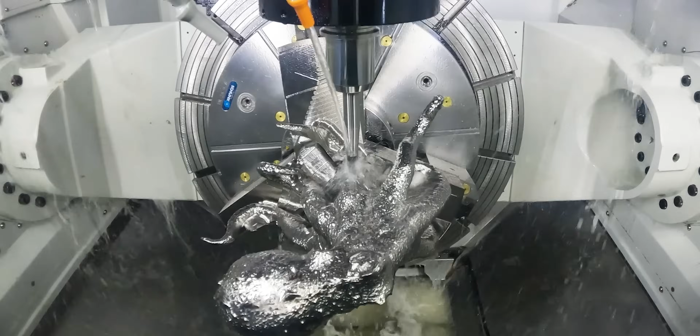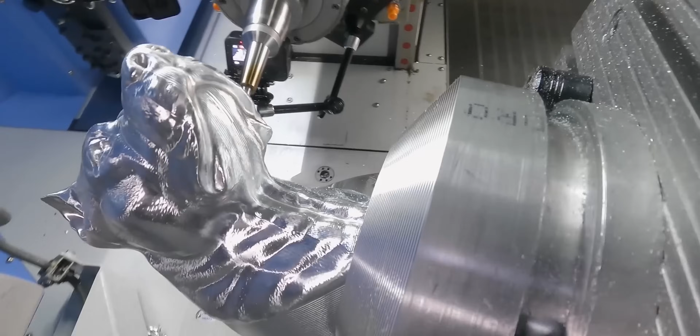In this video, we're going to be machining the Titan 200M. Before we get started, make sure that you've downloaded and printed the process document and all of the other documents related to this part. We've already completed the first operation because you should be able to take the setup sheet and what you learned in the Titan 139 video and apply it to this part and machine this first operation

on your own. So before you watch this video, make sure that you have completed operation 1, and if you need any help with that, refer to the Titan 139M tutorial. Now we've already loaded the tools and the program into the machine. Now we're going to look at our setup sheet of how we need to install the part into the vise. And there we can see that it's set up the same way as the Titan 139.

So Z0 is off the bottom of the part and X and Y is off the center of the part. So we're going to set Z before we put the part in the vise. Now we've probed the bottom of the vise to set our Z, but as you can see how tall this part is, and we've got a hat all the way around the material, touching off X and Y is not going to be as easy.

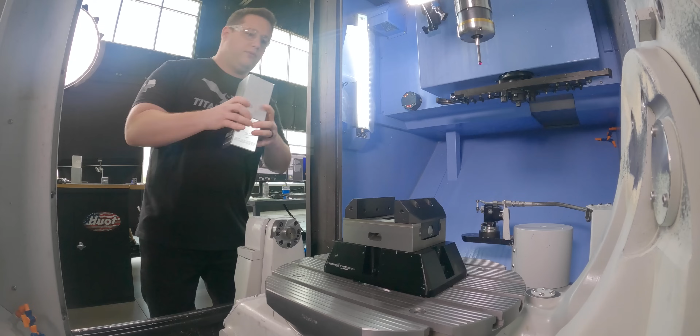So I'm going to show you a little trick that we can do in order to set our X and Y work coordinate. So first we're going to lightly clamp on this part where we want it in the vise and then install a vise stop. Now that I got my stop set, we actually need to set our C axis before we set X, because if we're crooked in any way, then our X and Y is going to be shifted off.

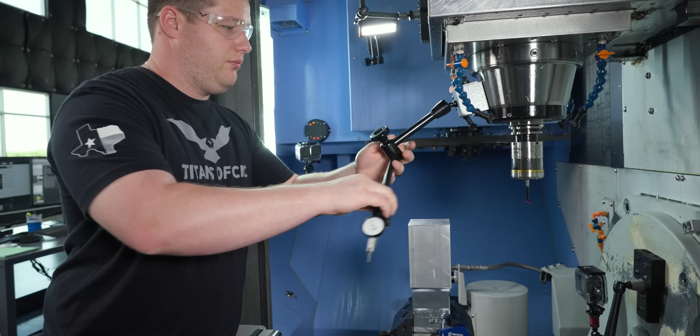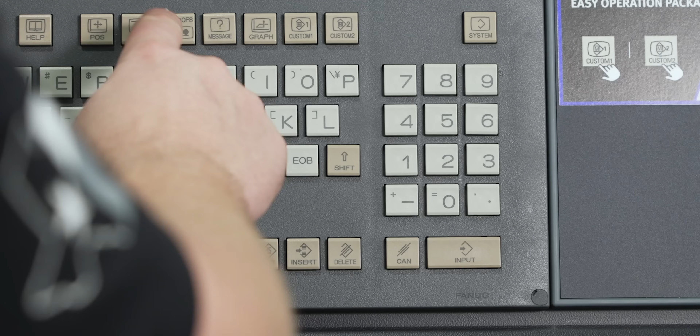Now in Op 1, we just indicated the vise jaw itself, but this is a centric vise, meaning both jaws can move, so we could have a little play there. And since we have a finished surface, we want to check that finished surface and make sure that it is in line with our C axis. All right, so now that our indicator is reading 0, we're going to go to our offset screen, go to our work, arrow down to our G54C, and I'm going to put C0 and measure.

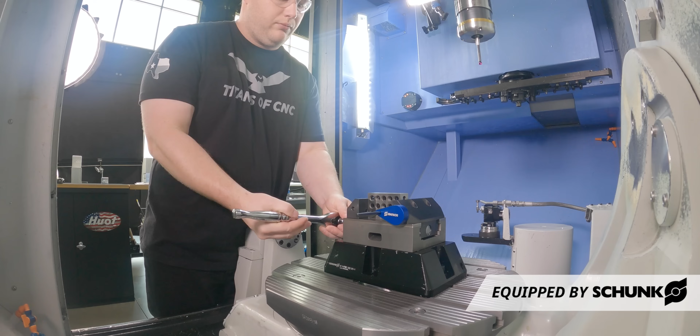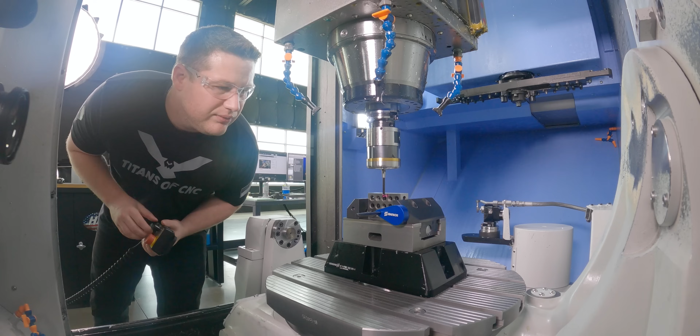Now we can take this part out and insert a 1-2-3 block in order to teach our X axis. So the reason why we're using a 1-2-3 block is because it has a ground face. And we have it pushed up against the vise stop because that is where the face of our part is going to sit. So what we're going to do is take our probe, we're going to probe this face, and then we're going to shift it over by half of whatever our part measures. That's going to set the X-axis work offset to the center of the part.

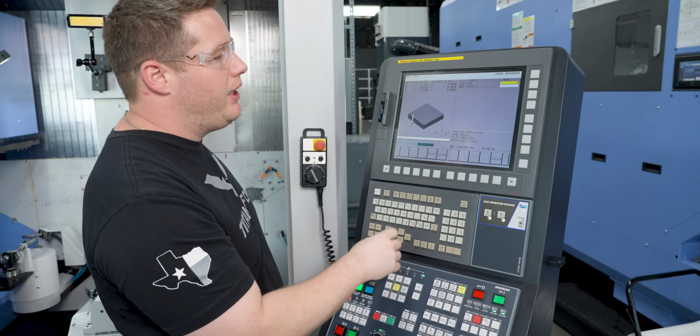All right, so now we got the probe positioned, so we're going to go to the GUI screen. We're going to select probe, but this time we're going to select edge. Now up here in the top right corner, we can see edge type. And we have a little graphic display right here on the left. So if we toggle this with our arrow, we can see the display changes to select what face we want to probe. So we're going to arrow over until we see the X negative direction.

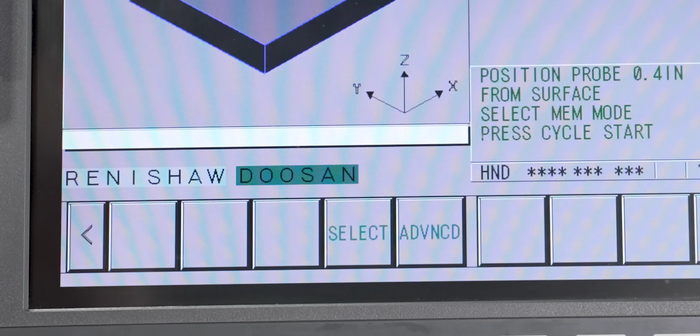Next, we're going to arrow down. Now we're going to input what work offset number we want to update. And in this case, it's 54. So we're going to type in 54 and hit input. Now all we got to do is put it in memory mode, close our door, and hit cycle start.

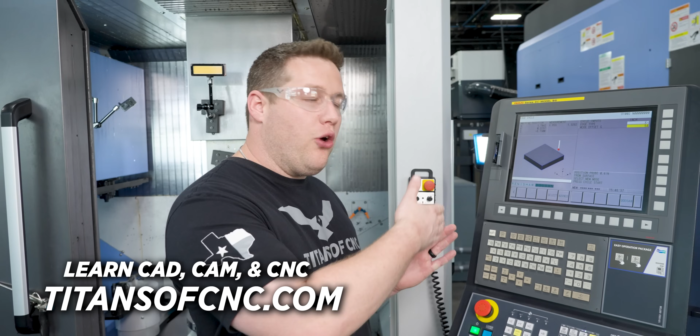Now after we probe that edge, we're not done just yet, because what that did is set our work offset on the edge of the part. But we need it in the center. So what we need to do now is measure our part, and whatever it measures, we need to take half of that and shift it in our work offset.

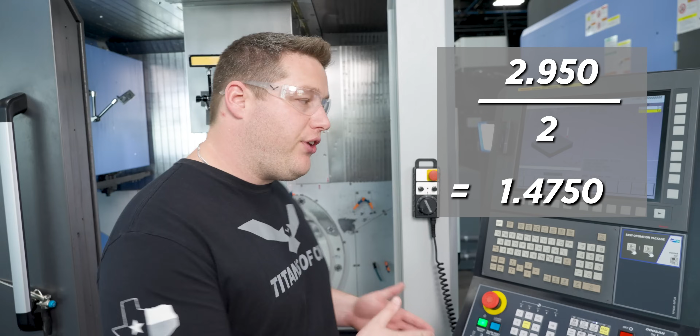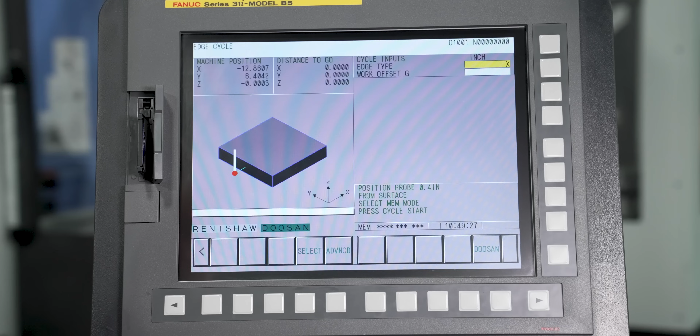So my part actually measures exactly 2.950. So half of that would be 1.475. And since I set my stop up on the right side, I need to shift negative 1.475. So what we're going to do now is I'm going to hit reset to clear out anything that might be active. We're going to go to offset. I've already got my work called up.

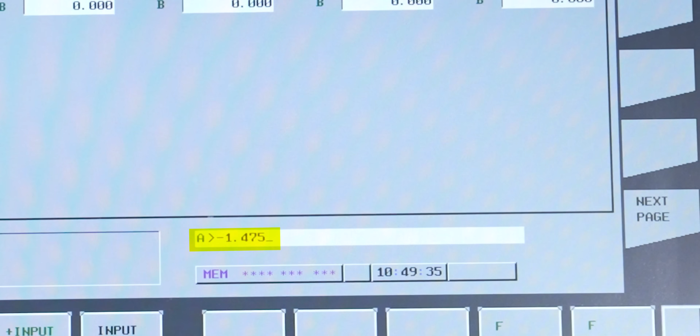And on my G54, I'm going to go to X and I'm going to say minus 1.475. Make sure the number is correct, and I'm going to hit input plus. That's going to ask me, is this input okay? And I'm going to hit execute. So with that, our X-axis is set, so now we need to set Y. And for that, we're going to go ahead and put the material in the vise and get it clamped down.

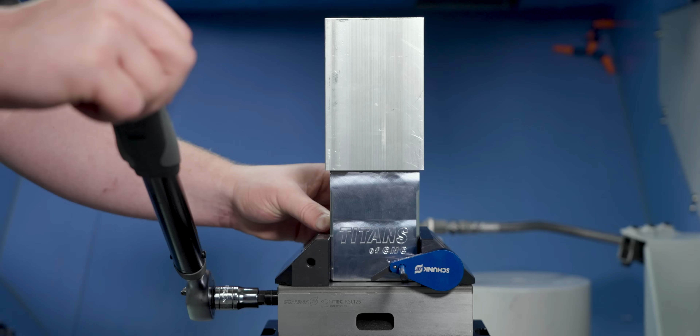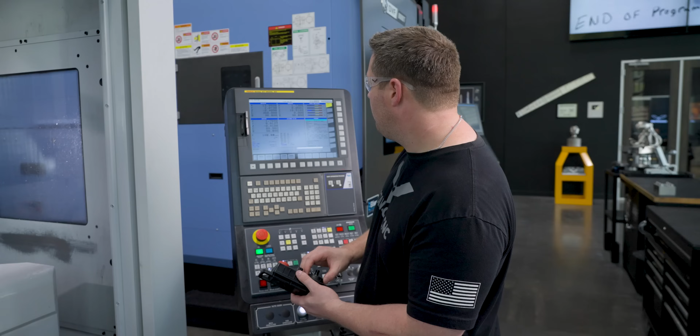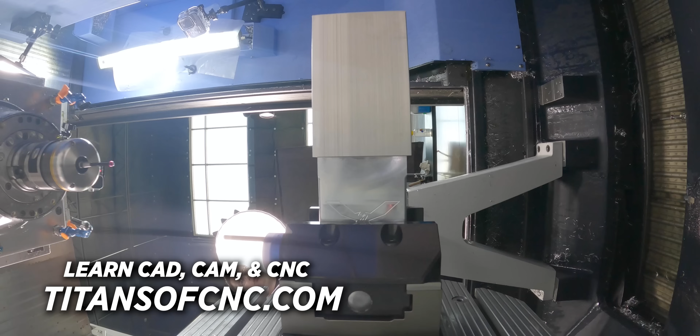So if I take my hand wheel and I rotate this down to 90 degrees, so now I'm at B90. Now I can simply position the probe in the center of the part. So now you see the probe is positioned roughly in the center of the part, ready for the web routine.

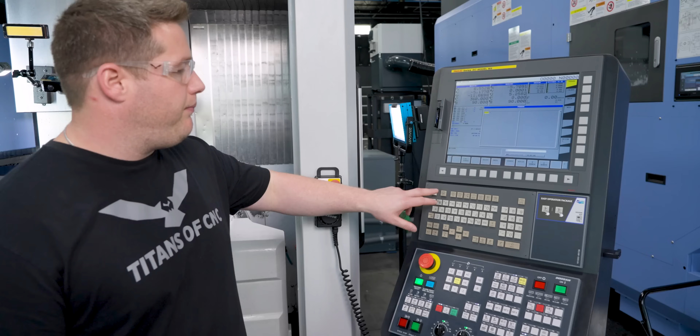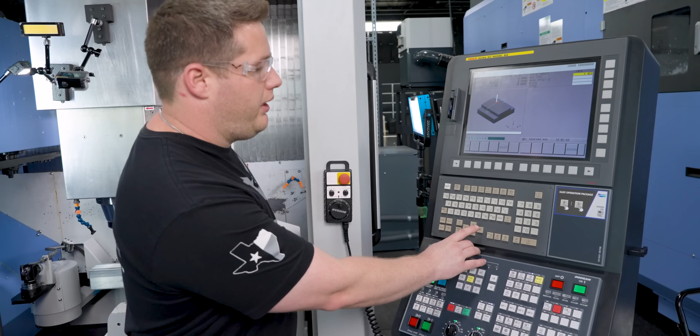Now one thing to keep in mind here is that we want to make sure that your C-axis is at C0. So now we'll go to the control and type in our parameters for our web routine. So we're going to put it in MDI mode, go to program, make sure we hit reset a few times. We're going to go to GUI and probe. Now we're going to hit that web. Now we're going to change to Y web.

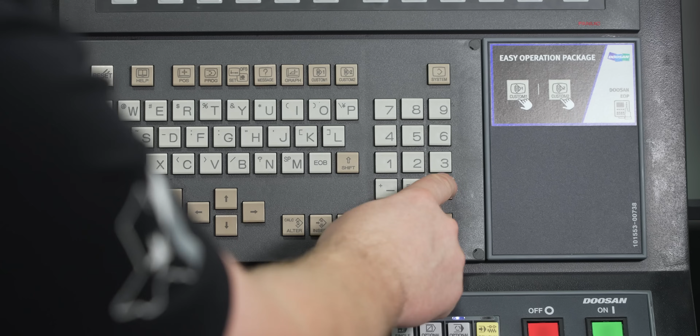We're going to set G54. The width, I'm just going to say 3 inches. That's just a little bit over what our finished size is. And for our depth, I'm just going to put in a 1/2 inch. So now all I got to do is close the door, put it in memory mode, and hit cycle start.

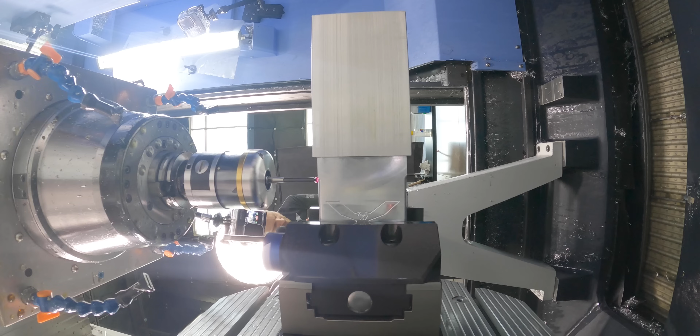So now we've probed our work offset, it's time to do a dry run. But as you can see, the part is so tall that we won't be able to just add 6 inches to the height and run the program. So what I recommend doing is, now that we have a vise stop set, you can remove your part, dry run the program, then put it back in to run the part.

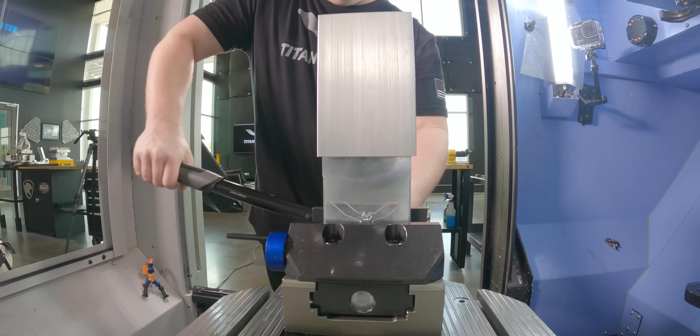So we just completed our dry run, we got the part put back in. Now I'm going to remove the vise stop, and it's time to cut some chips. Now we're not using coolant on this part, but that's just for filming purposes. If you run yours, make sure that you run coolant.

Now notice on this part, when we're on the third side, we're kind of working up that wall and it's barely even touching any material. That's because on the stock tab in our Mastercam file, we had it set to ignore small cusp and we had a 25 thousandths value in there. You can actually go back and play with that value to make this cut even more or a little less.

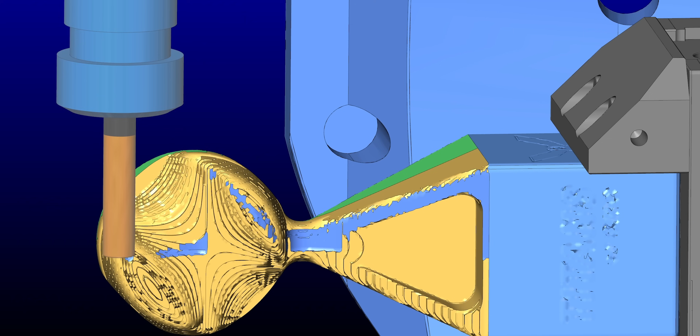So what it's doing is it's seeing those small cusps and thinking that there's material there to cut. So you can actually put a bigger value in there and get rid of some of these small cuts that are not really doing anything.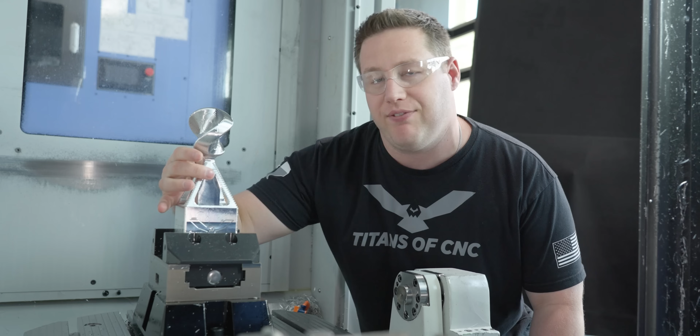All right, so tool 1 is complete. We've got all of the roughing finished except for the material that we left inside this pocket. Now, if you remember from the CAM tutorial, we left all of this in here to give us a little bit extra rigidity. But we still have this small diameter here, and we've got to finish that when we finish this top part. So we still want to look out for any chatter that we might get from this small diameter. And if we do get any, it's going to be from tool pressure.

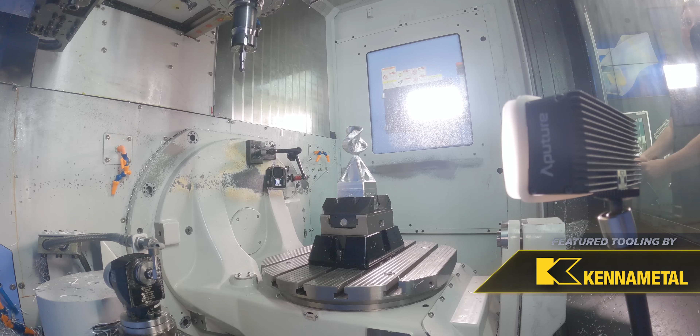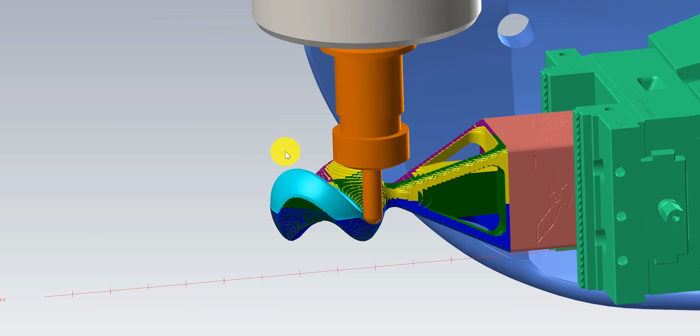So we're going to call up tool 5, which is the ball mill, to finish this top portion. Now we went straight to the finishing from the roughing because the roughing tool was able to get most of that material off of there. But as you can see on the part, you've got a lot of different scallops on there. So that's going to mean that the material is going to be inconsistent as the tool is trying to finish. This being a soft material, it's going to be a lot more forgiving.

Now, if this was a real part for a customer, or if we were making it out of something that was a little bit harder to machine, we would probably go in and create a semi-finishing operation before we would come in and finish. So what we would do is we would take the same exact tool path as our finishing, except we would add a little bit of stock, and then we would increase the step over. You don't need a very small step over because it's just a semi-finishing tool path.

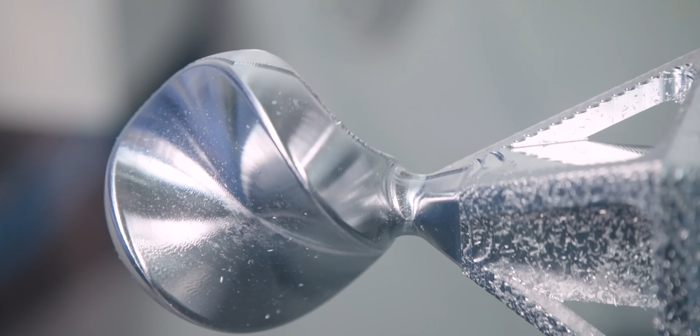We're really just looking at knocking down all of those scallops and making it an even cut to come back and finish with. Now that's going to make your surface finish a lot more even, and it's going to even out the tool pressure as well. Oh man, check this out. This thing is looking beautiful.

Now that we've got the top finished, now it's time to come in with that face mill and face these 4 legs. Now, right here is where it's really important for your tool length to be set correctly, because that face mill and the ball mill that just ran are going to blend right here at the bottom of these legs. So if one of the tools is sitting higher than the other, you'll see a step right here.

So on the face mill, we're able to check that the length is correct by checking this width of our square at the bottom from op 1. Now for the ball mill, we can actually check the diameter right here to make sure that it's correct. So as long as we check those and get them measuring right, we should have a perfect blend right here.

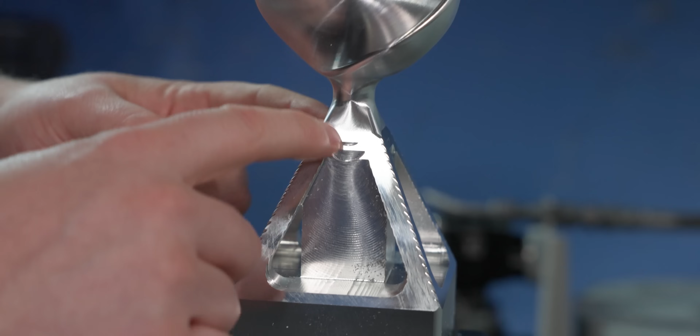Alright, so now our face mill has run, and as you can see, we got a nice blend between these two tools. So now we're going to come back in with that 1/2" tool, rough out these pockets, and then it's going to come in and finish these walls. After that, all that's left to do is bring in our ball nose tool and finish these fillets around the outside and deburr the top of the pocket.

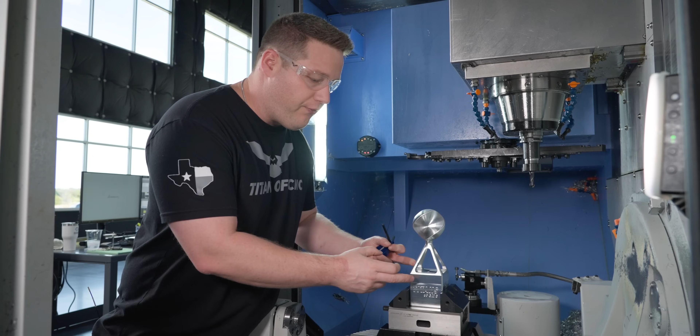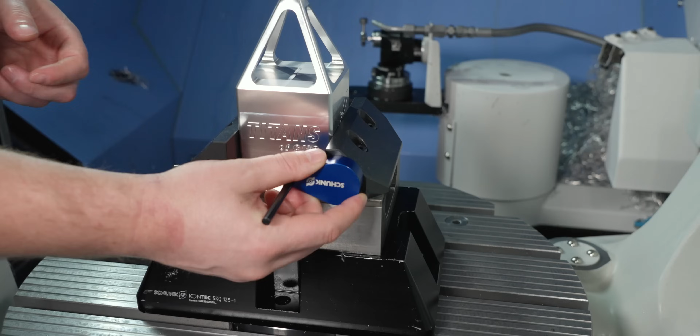So we're going to set that up just how we did on this part, on the right side of the vise, touching the bottom of the part. Tap it on, push over till it touches, and lock it down. Now we can take our part out and locate our next part.